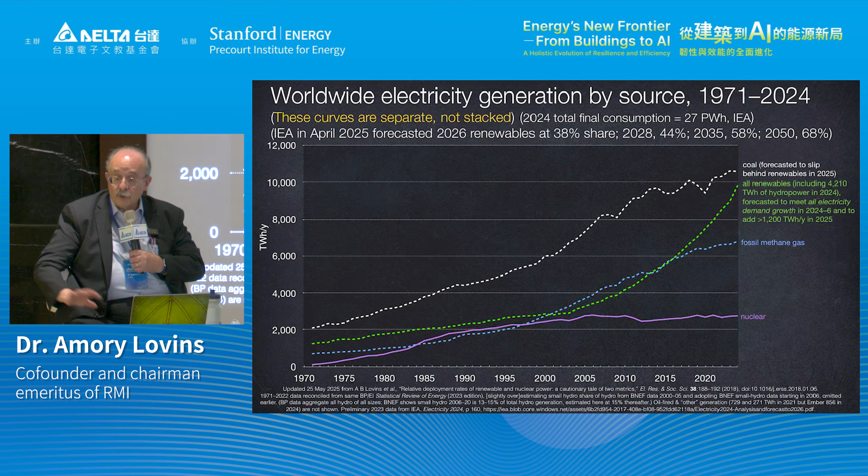Renewables keep getting cheaper as we buy more, because mass producing more equipment drives rapid learning. In contrast, mining fossil fuels causes depletion and raises political risks, so costs rise. Also, renewables deliver energy at a constant price, while fossil fuels tend to have volatile prices.

Valuing that volatility would about double the price of US methane gas, still without counting its carbon or methane emissions. And if we value secure and resilient energy, renewables are worth even more. Most of the world's dangerous instability today has its roots in rivalry over the unevenly distributed fossil fuels that renewables can put forever behind us.

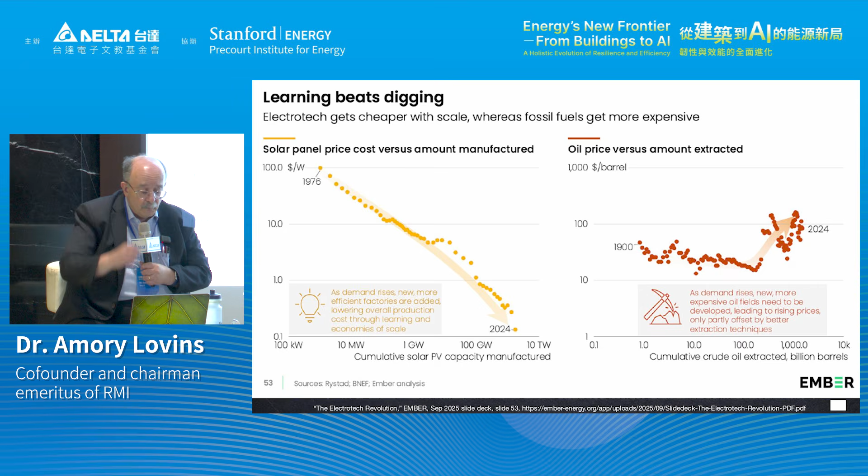And since modular renewables are small, cheap, and quick to build, they can sustain lots of experimentation and rapid learning, while a single massive thermal project is still under construction.

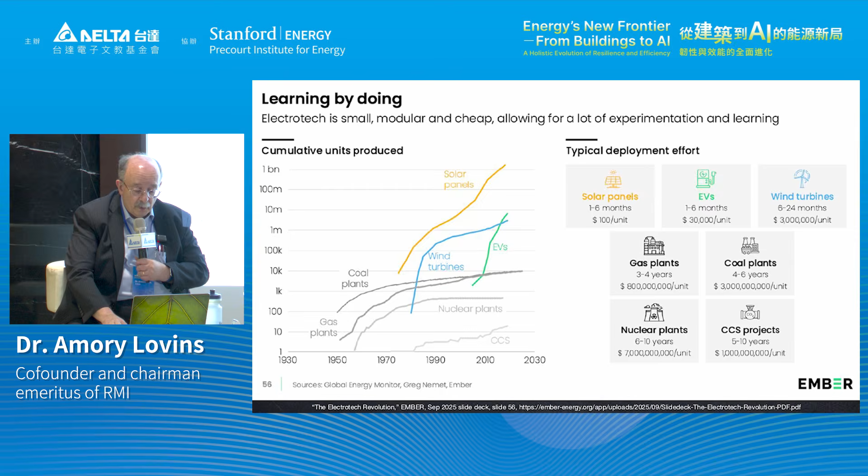Solar capacity alone is surpassing every other global source of electricity, while battery storage surpasses pumped hydro storage. Notice in the left graph how many rivals solar capacity has exceeded in just a few years.

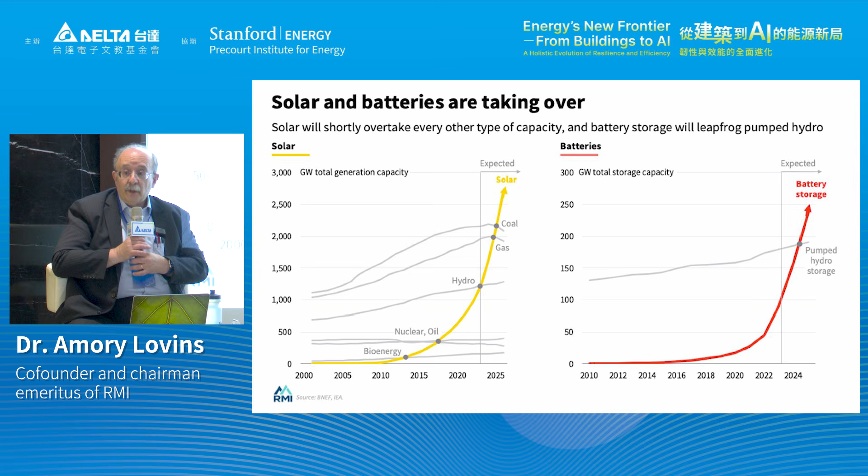A year ago, renewables and batteries were the cheapest choice to make about two-thirds of the world's bulk electricity. And they cost less than just operating about 3/4 of existing power plants.

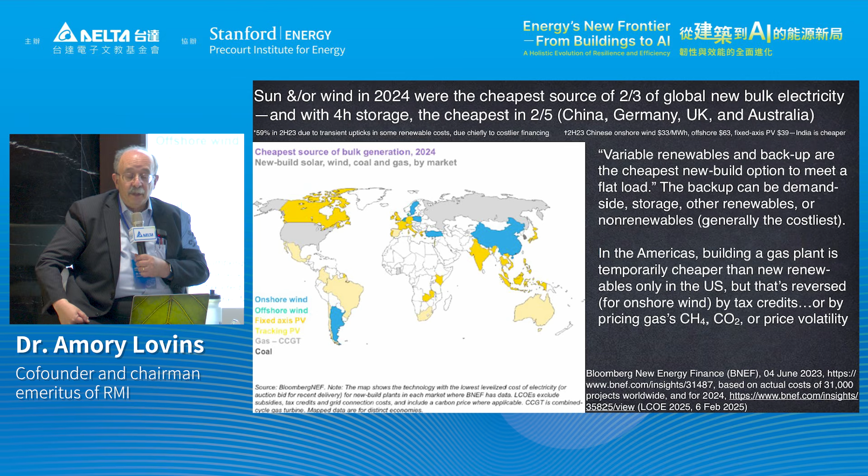Thus, Bloomberg confirmed that the cheapest way to meet a flat load is now solar or wind power plus backup, which can come from efficient and timely use, or storage, or renewables, or generally the costliest fueled generation. So this is why 3/4 of the new firm capacity being added now in India is solar plus batteries.

Renewables can also be incredibly fast to build. A year ago, North America's biggest microgrid was built in 4 months in Sparks, Nevada. Redwood Energy laid 20 megawatts of photovoltaic panels on the ground.

Or where land is costly, the batteries can be safely, cheaply, and compactly stacked up. Then Redwood Energy used novel power electronics and software to combine the world's biggest array of second life automotive batteries, about 800 electric vehicle battery packs, each wrapped in a white tarp and set on cinder blocks, into 62 megawatt hours of unified storage.

Those batteries provide 2 to 48 hours of storage as needed for a few years, then they get hot swapped and recycled.

The result is a 100% solar, 24/7, 365 power supply, delivering 12 megawatts for on-site modular data centers, more reliably than grid power and cheaper than its 8 US cents per kilowatt hour price.

Solar microgrids are safe, silent, virtually water and maintenance free, zero emission, profitable, scalable, and, if necessary, portable. This is what AI speed, ultra reliable, clean power looks like. Gas, coal, and nuclear are not.

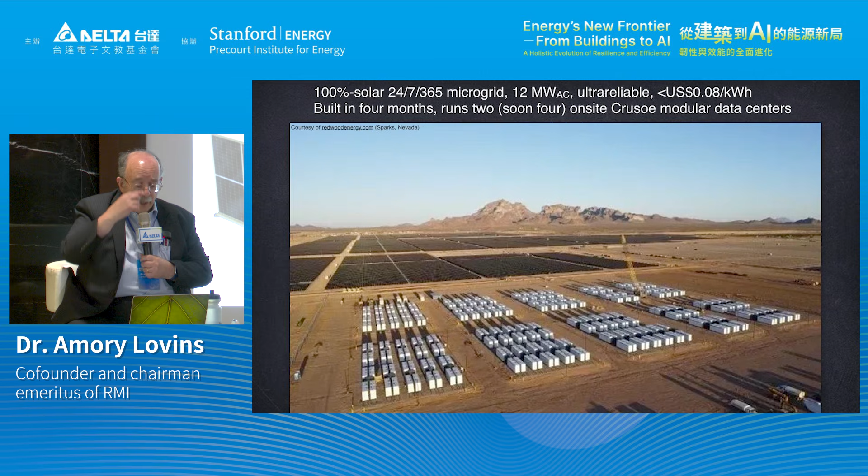A recent Australian innovation slashes solar system costs perhaps by as much as half by eliminating frames, single module handling, racking, wiring, and foundations. Folded up, pre-assembled modules unfold from a hinged stack in a shipping container into long pre-wired rows that can easily be attached to land or structures or over water or crops.

Of course, many people in Taiwan believe that there is not enough land here for solar power. This would be more convincing if we saw solar panels on any of the buildings, but it's very rare. Yet, a paper in Nature 5 years ago showed that the world could run entirely on rooftop solar power.

And this can be built incredibly quickly, as we have seen in Pakistan and in Vietnam.

Some of the biggest installations are agrivoltaics, solar over cropland. Because this manages the moisture and temperature of the soil, it can actually sustain or increase crop yields. It's also very good for grazing animals, which like the choice between sun and shade.

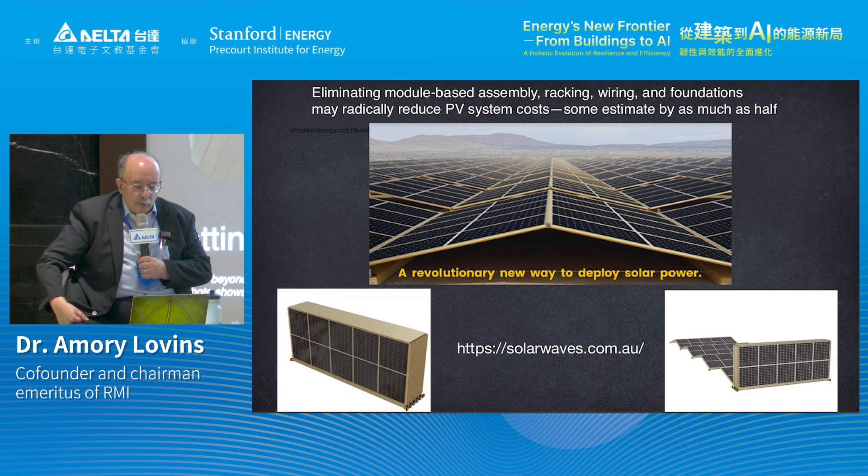Where renewables need a stronger grid, advanced conductor wires carrying twice as much current could nearly quadruple the US transmission addable by 2035. Today's best conductors are even better, carrying 3 and soon 4 times the normal current. They can decongest grids, grow renewables even faster, and make the grid more resilient with smaller, fewer, cheaper towers and far fewer new transmission corridors.

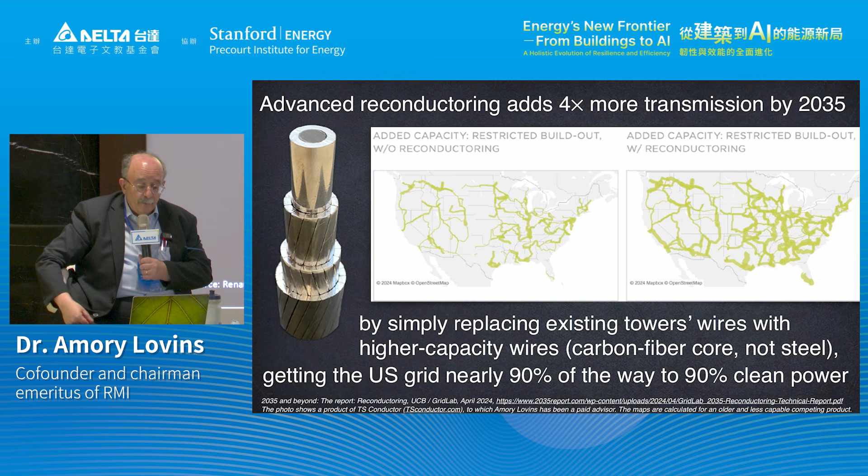A fifth of the world's new cars are now electric, and when they're parked, their batteries can support the grid and provide emergency power directly to buildings using Delta Electronics equipment. French drivers can already get a subsidized electric car for free, charge it for free, and even make money by selling back up to 21 kinds of services to the grid when the car is parked. In Europe, this can earn about $1,000 per car per year, several times the driving cost. Another powerful path to a renewably powered and resilient Taiwan.

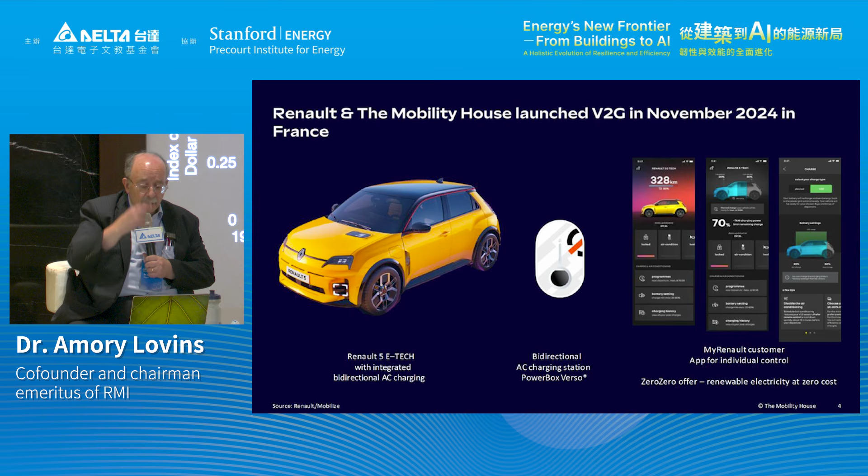But the biggest untold story is about efficiency, about wringing more work from our energy. Around 1975, US government and industry all said that the total energy input needed to make $1 of GDP could never drop. A year later, I heretically suggested it could drop 72% in 50 years. Well, in the first 49 years, it dropped 65%. But just the innovations already added by 2010 could save another threefold, twice what I originally thought, at a third the real cost. With 16 more years of efficiency innovations, now we can do even better, as I'll illustrate next.

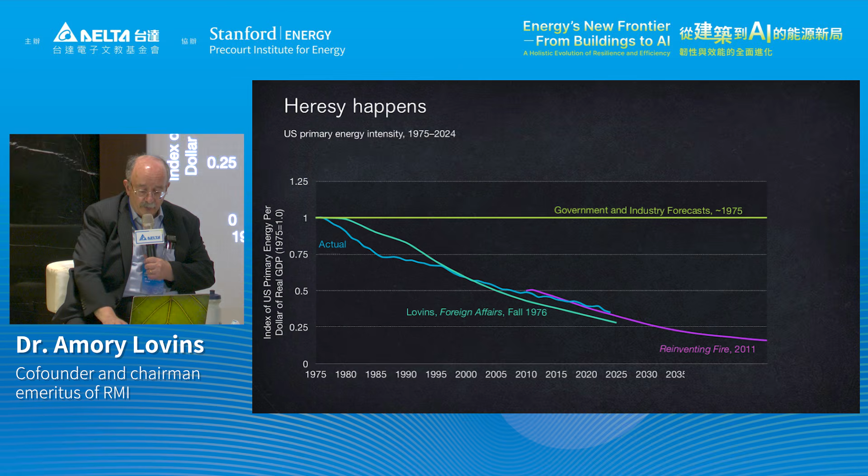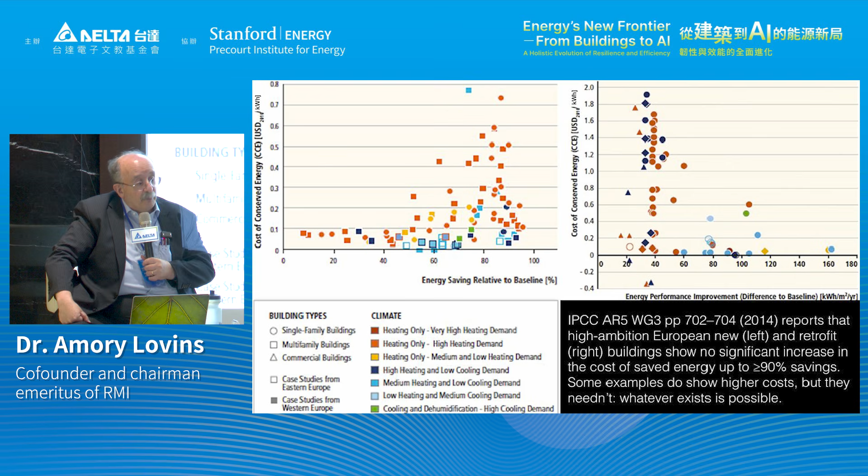Let's start with buildings, which use 3/4 of US and half of world electricity. Here are two graphs that IPCC reported 12 years ago, with bigger savings toward the right and lower costs toward the bottom. Among European new buildings on the left and retrofits on the right, the best projects saved up to at least 90% of their energy without raising the cost of saved energy. Many projects toward the top of both graphs did cost much more by not adopting the best practices shown. That difference is a business opportunity, as also for Taiwan.

A few examples of what's possible. My wife Judy and I live in our owner-builder house, 2,200 meters up in the Rocky Mountains near Aspen, where temperatures used to drop to minus 44 Celsius. The central atrium of our house, seen here in a February snowstorm, has so far produced 83 passive solar banana crops with no heating system. That was cheaper to build 43 years ago because leaving out the heating system subtracted more construction cost than super efficiency added. Our house helped inspire several 100,000 passive buildings in Europe with no heating and roughly normal construction cost.

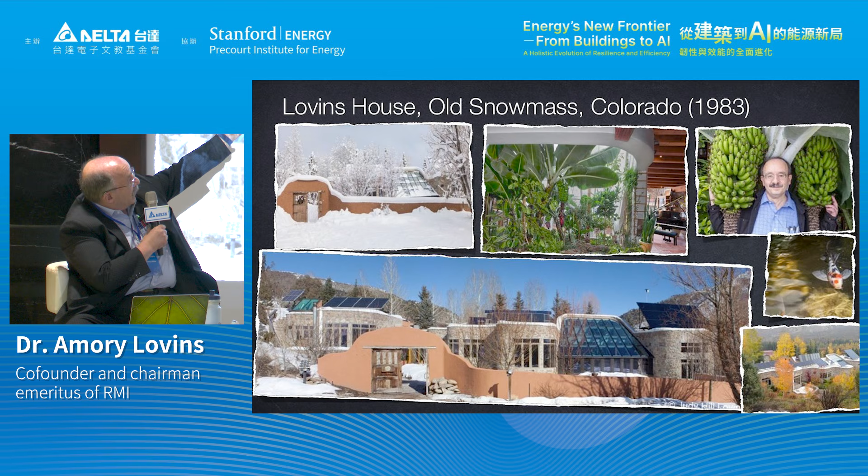A Bangkok analog saved 90% of the air conditioning energy with better comfort and normal construction cost. Nearly everyone on Earth lives in a climate between Bangkok and Old Snowmass, Colorado. But wherever you live, integrative design gives many benefits from each expenditure. So the white arch at the top has 12 different functions, but it has only one cost.

In 2010, our integrative design retrofit saved 38%, now 51%, of the Empire State Building's energy with a 3-year payback. The owner's latest ambition is 80%.

3 years later, our cost-effective retrofit saved 70%, making this half-century-old government complex more efficient than what was then the best new U.S. office, which in turn is only 1/3 as efficient as RMI's net positive, no mechanicals passive office, which uses about 1/9 the normal amount of energy in the coldest North American climate zone. This Bavarian building uses 2/5 less energy still. Takenaka retrofitted its Japanese, very typical office to save 72% of its energy without disturbing the occupants. Yet all these technologies existed more than two decades ago. What mainly improved is not so much technology as design, and both keep improving.

The Dutch energiesprong method of super outsulation can probably retrofit most buildings to net zero energy and install in as little as a day. Inside the house, the best heat pumps can heat 6 to 15 units of hot water per unit of electricity. Cooking efficiency can quadruple. I doubled ours just by using Turkish vacuum-insulated pots and pans.

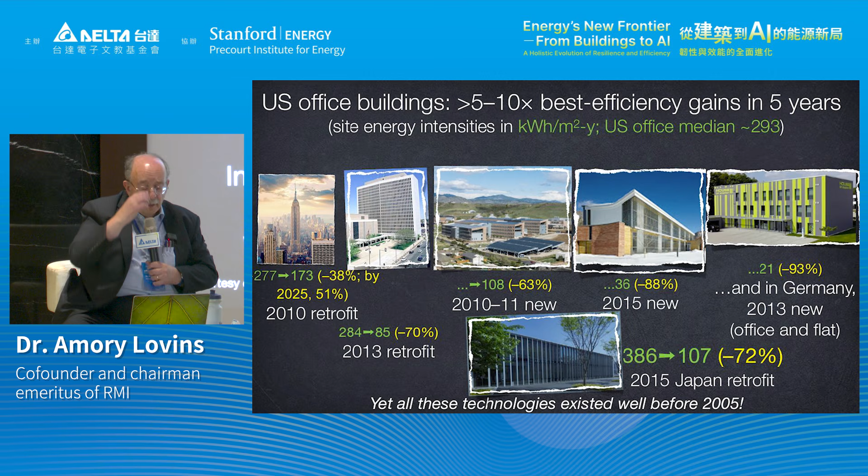In 6 very hot and humid Indian cities, 1.5 million square meters of integratively designed offices used 80% less energy than the Indian norm, with 10 to 20% lower construction cost, 60% less cooling capacity, but superior comfort and satisfaction. Glare-free lighting is delivered throughout by contract. If workers complain of glare and demand blinds, the architect doesn't get paid.

But now there's an important new cooling option, delivering coolth radiatively. In this shaded pavilion, Singaporeans stayed comfortable outdoors without cooling, drying, or significantly moving the hot, humid air. At 32 degrees and 80% relative humidity, their body's far-infrared radiation was absorbed by panels shielded by a thin plastic film and cooled by 23 to 25 degree water. Special radiant roof surfaces can now cool that water passively, even in full sunlight or under monsoon cloud, using no electricity. If this approach can be made cheap and vernacular enough to retrofit into the world's hot climate apartments and slum dwellings, that could potentially eliminate global growth in peak electricity demand.

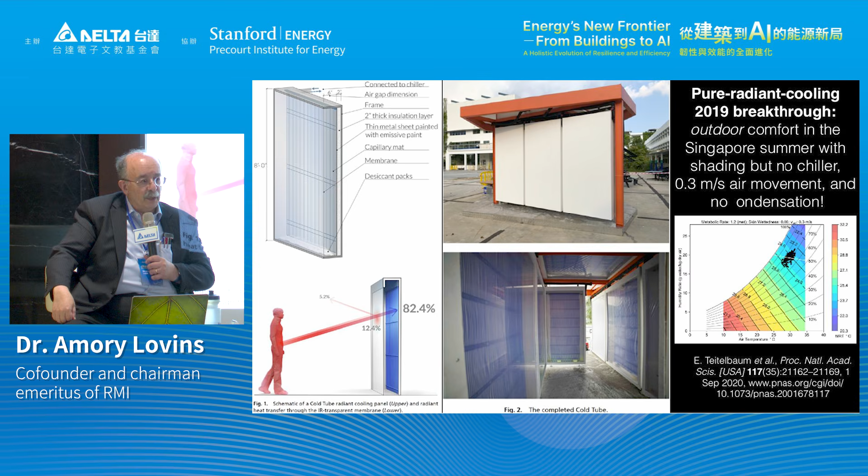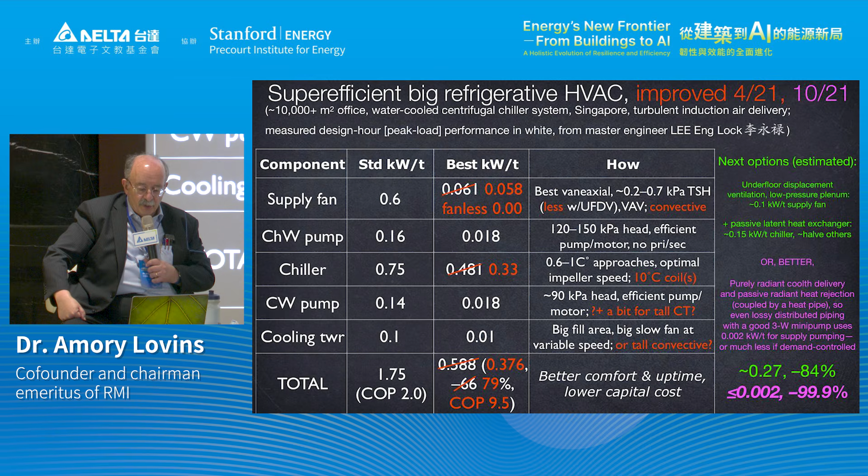Mechanical cooling is common and important in Taiwan. In the 1990s, Lee Eng Lok's world-leading practice in Singapore regularly reduced the measured power intensity of standard big building HVAC systems by 66%, as shown in white. That's for the whole system, supply fans through cooling towers, at the design hour. 5 years ago, Mr. Lee could raise that whole system saving to 79%, 9.5 units of cooling per unit of electricity.

That's shown in red. Adding underfloor displacement ventilation and passive latent heat exchangers could raise the saving to 84%, in green. Even more radically, in magenta, radiant coolth delivery plus passive radiant heat rejection could probably cut total cooling power to roughly 1/1000th of standard practice, with much lower capital cost. Let's try this in Taiwan. What are we waiting for?

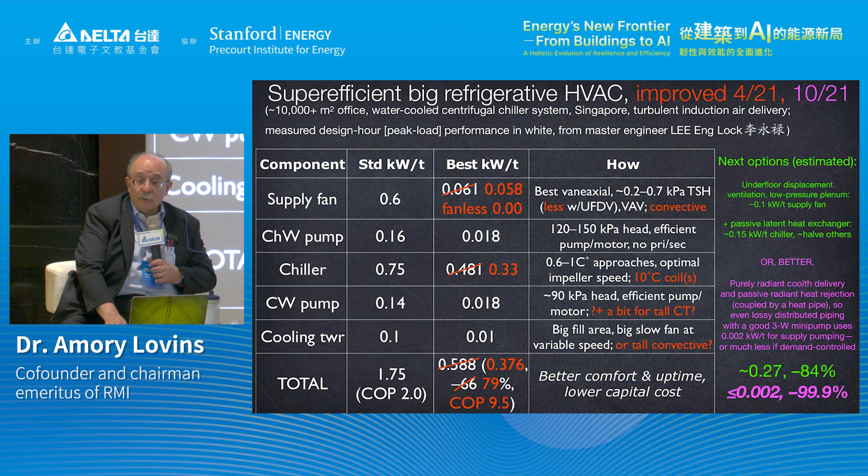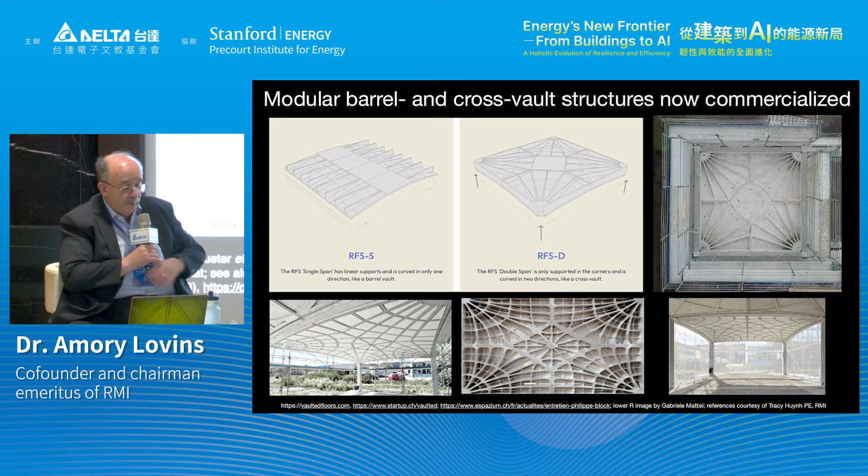Now combine the thin floor slabs with passive design, which eliminates a vertical meter or so of mechanicals at each story. This allows 3 stories with normal 2.8 meter ceiling height to fit in the vertical space now occupied by 2 stories. Cost, complexity, and time fall dramatically. You get about 55% more net rentable space in the same height and the same footprint. And it's cheaper. Why would you build any other way?

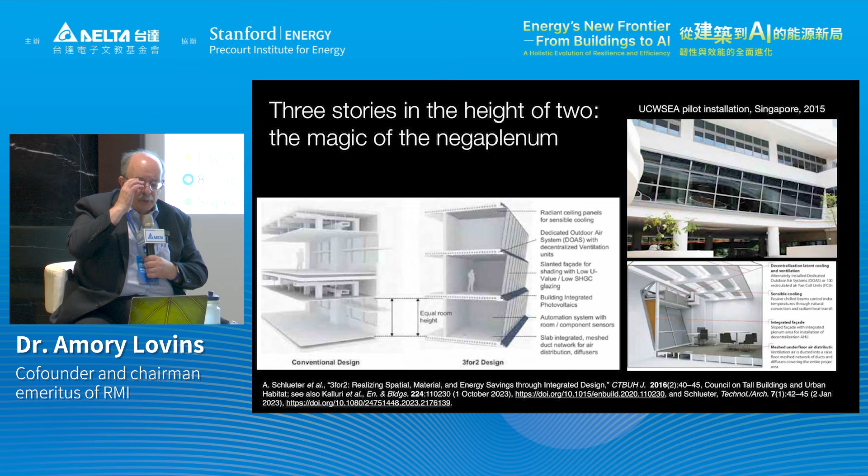Industry uses half the world's energy and electricity. My RMI team's latest $60-odd billion worth of industrial redesigns typically found about 30 to 60% energy savings on retrofit, paying back in a few years and far outperforming the orange zone in the upper left, where most energy service companies deliver disintegrated design. The shaded big blue circle summarizes mechanical retrofits in 8 chip fabs, averaging about 40% saving with a 1.5-year payback.

Our new build industrial projects generally found about 40 to 90+% savings with lower than normal capital costs. The shaded blue circle is a new chip fab. Our integrative design combines conventional technology with beginner's mind.

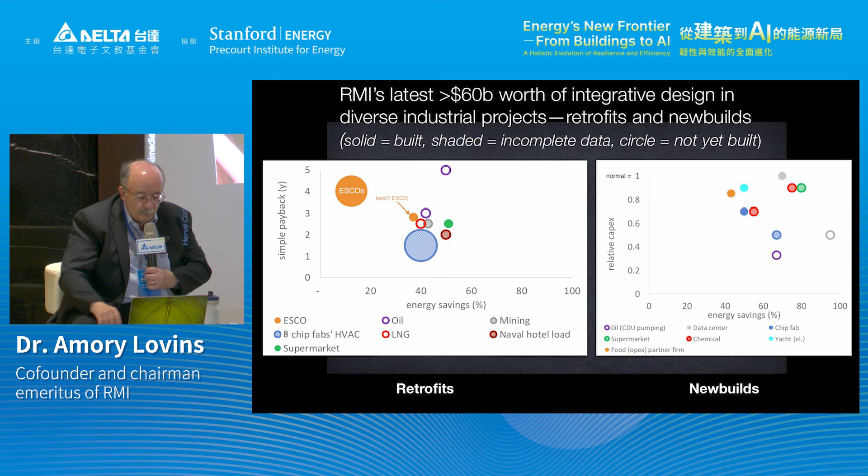For example, half the world's electricity runs motors. Half their torque runs pumps and fans, feeding into pipes and ducts. If the pipes and ducts are made not thin, long, and crooked, but fat, short, and straight, their friction drops by 80 to 90+%, 97% in our house. Typical payback times are less than a year in retrofit, instant in new build. Yet this is rarely taught or done because it's not a technology, it's a design method. And few people think of design as a path to speed and scale. But if everyone did this, it could save 1/5 of the world's electricity.

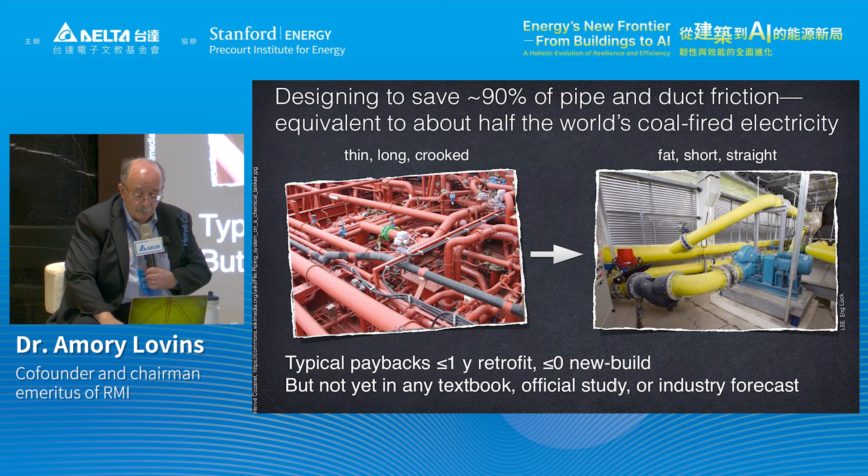To do this magic, we simply make two changes in the design process. First, we specify big pipes and small pumps, not small pipes and big pumps.

Friction in a pipe falls as nearly the 5th power of diameter. So how fat should the pipe be to optimize the friction? The textbooks say to make the pipe just as fat as will repay its extra cost over the years from the saved pumping energy. But that's wrong, because it leaves out the capital cost of the pumping equipment.

The pump, motor, inverters, electricals must all be big enough to overcome the friction. So their size, and roughly their capital costs, will fall as nearly the 5th power of pipe diameter. Yet the capital cost of the fatter pipe rises as only about the 2nd power of diameter. So when we optimize the pipe as a component, we pessimize the system. Instead, optimizing the entire system yields fat pipes, tiny pumps, so the total capital cost goes down.

The second design change is even simpler, therefore harder. We lay out the pipes first, then the equipment, not the reverse.

Traditionally, we put the tanks, boilers, and so on in convenient, arbitrary places. Then we ask the pipe fitter to come connect point A to point B. But by then, A and B are far apart. Other stuff got in between. They're at the wrong height. They face the wrong direction.

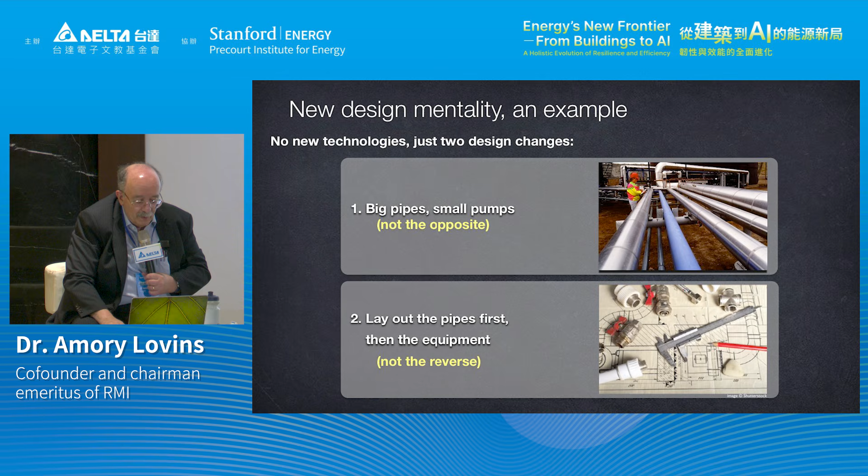I'm currently writing an illustrated how-to manual called The Tao of Pipes. It's a hilarious dialogue between two fictitious Chinese factory engineers discovering together how to untangle their pipe noodles.

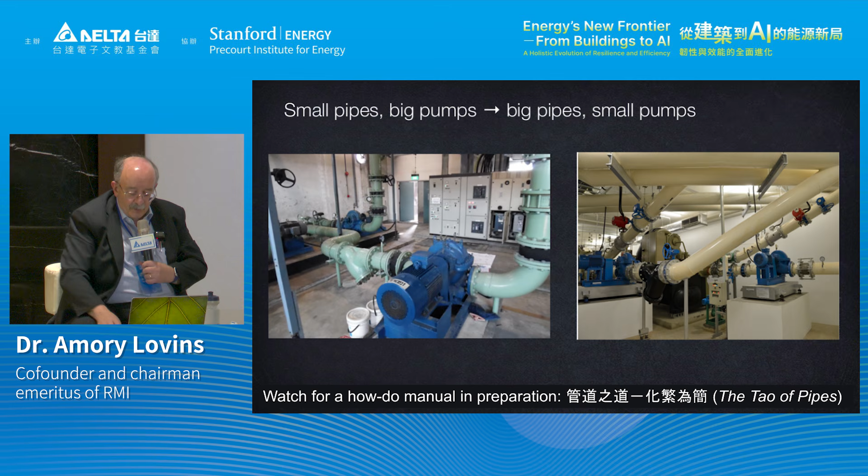Applying these concepts at the Oakland Museum in California, Peter Rumsey retrofitted an efficient layout into the condenser water pumping loop. This cut the energy for pumping by 3/4 with a 2 or 3 month payback, and it eliminated 15 pumps that will never again waste energy and maintenance costs.

When he also repiped the chilled water loop and added variable frequency drives, this doubled the flow and saved 85% of the energy.

To help the pipe fitters understand how to minimize friction, he simply asked them to lay out the supply pipes as if they were drains. Because in another part of their brain, they know that drain pipes, whose flow is driven only by gravity, not pumps, will clog if they're too small or have too many elbows and joints.

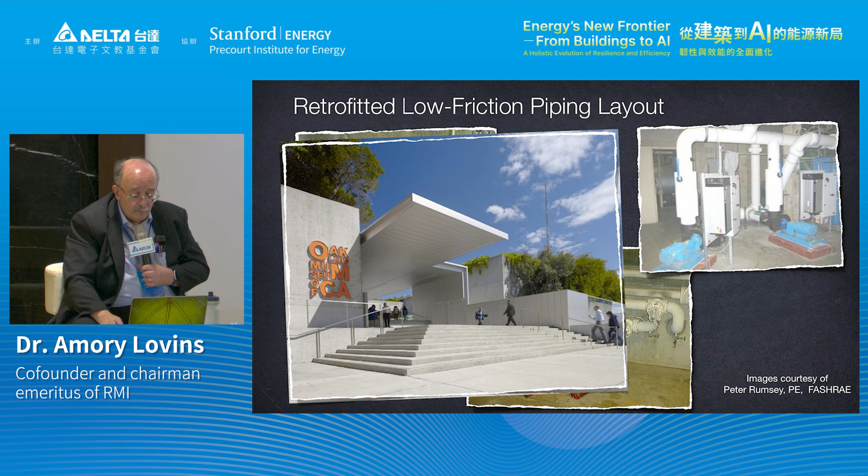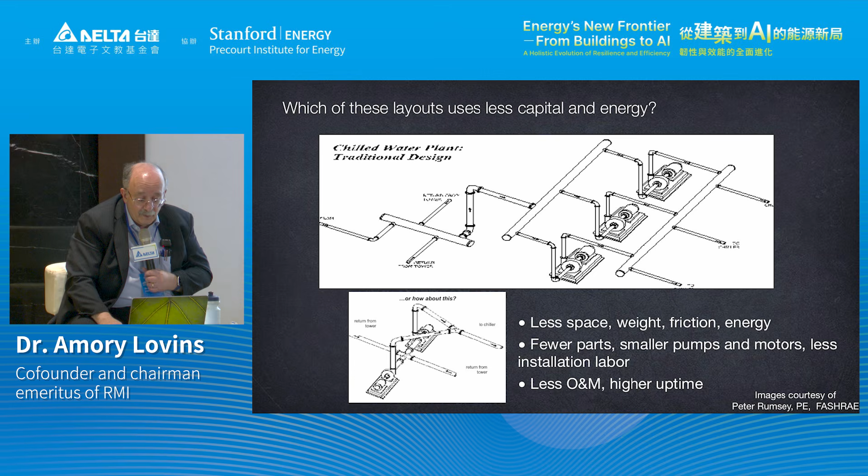In a Dutch industrial case, this approach cut pumping energy by at least 7-fold. Actually, the engineer measured it at 12-fold, with lower capital cost. And as a free bonus, it also saved 70 kilowatts of heat loss with a 2-month payback, because it was easier to insulate short, straight pipes.

But belatedly, I realized we had left out 8 additional benefits we could have captured, each justifying even bigger savings. I later estimated that if we'd properly valued these extra benefits, we would have saved not 86 to 92% of the pumping energy, but probably around 98%, with even lower capital cost.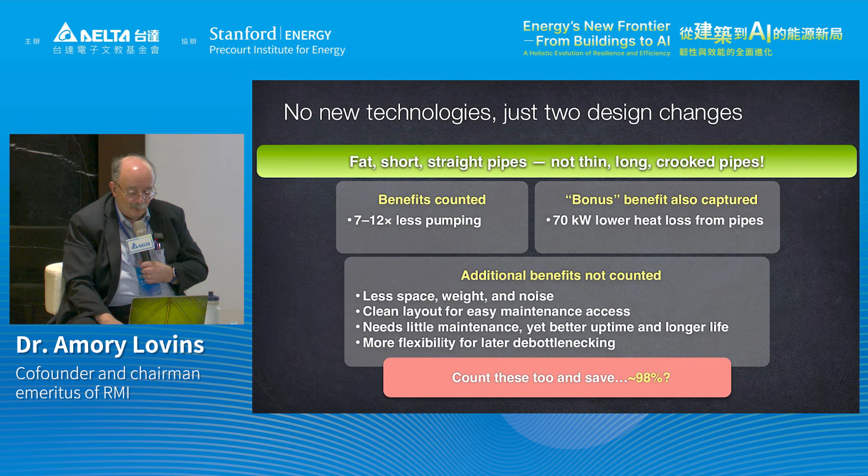Now think of the whole power and pumping system. From the fuel burnt at the thermal power plant to the end use, many successive losses compound, so only 1/20 of the energy in the fuel comes out the pipe as flow.

But now turn those compounding losses around backwards from right to left, and they become compounding savings. Every unit of flow or friction you save in the pipe saves 20 units of fuel, cost, emissions, and global weirding back at the power plant. And as you go back upstream, the components get smaller and cheaper, so the total capital cost goes down. Combine that with improvements to the motor systems as you make those 5 or 10 times smaller, and you raise the potential electric savings from 1/5 to 1/3 of the world's electricity.

That's not in any official forecast, studies, standard textbooks, or climate models. Again, that's because it's a design method.

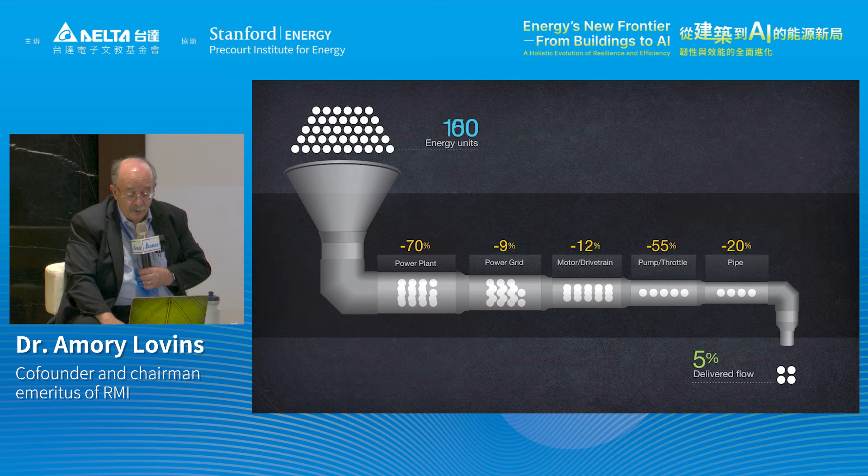Now think about this in a classical data center. Two-thirds of the fuel fed to the thermal power plant is lost in the plant and grid. Half that electricity is lost in the cooling system and uninterruptible power supplies before reaching the servers. Half the server energy does not reach the chips because it's lost in inefficient, usually very underloaded power supplies, not made by Delta.

And lost in lots of fans taking heat that largely shouldn't be there off the motherboard into the room, so we can do dumb things with it. The next problem is severe underutilization of computing resources, partly through lack of virtualization.

So the resulting energy flow is so small it's about to vanish, so let's magnify it. Next comes bloatware, running many unnecessary threads and processes and making simple tasks very complex, because the compute cycles were cheaper than programmers' attention, and someone else bought the energy.

Downstream of all that, you may even have inefficient business processes. So altogether, a few hundred thousandths of the original input energy in the fuel ends up delivering customer value.

Where should we start fixing this? Downstream. First, we write elegantly terse code, efficiently compiled, with the goal that every compute cycle is needed and wanted. I had assumed this might save an order of magnitude in compute cycles. Actually, it's 2 orders of magnitude, and with today's AI slop, it might be 3.

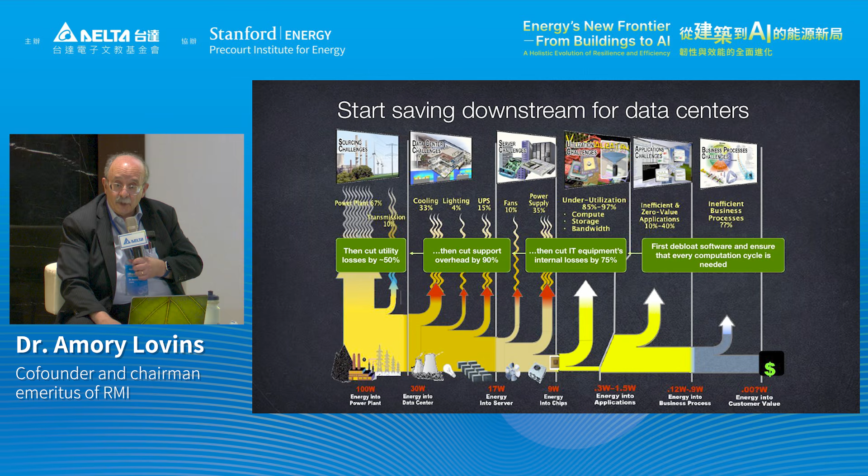In the project for which we made this diagram, our partner EDS said that if our recommendations had all been adopted, we would have saved about 95% of the total energy and half the capital cost. In fact, the client rejected most of those suggestions that EDS agreed with, so we could only triple the efficiency at the same cost. Very disappointing.

But progress continues and adoption expands. In just 8 years, the world's data centers had enormous growth shown on the left in all their parameters, but almost completely offset that activity growth with a combination of efficiencies, the blue bars. So computing went up 550%, electricity use went up only 6.5%.

In the past few years, AI-boosted growth might be changing this pattern, but that may not last because electricity used per unit of AI services is falling by about 4-fold per year.

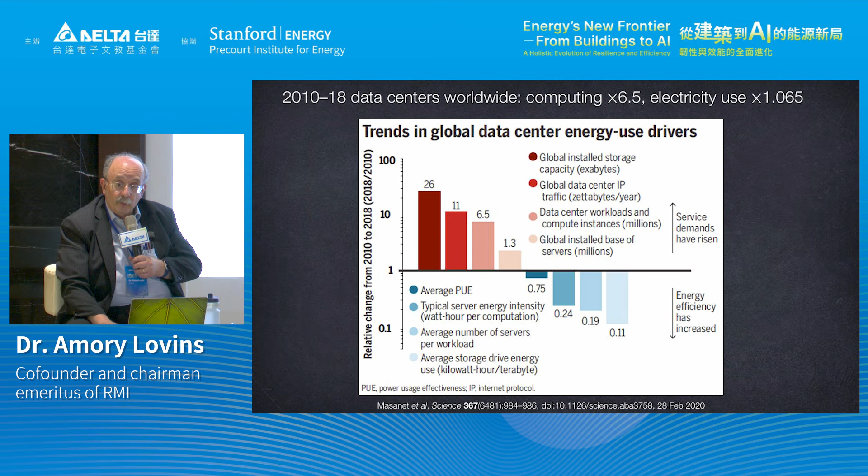In 2003, we convened over 90 industry experts and together found ways to save about 89% of data centers' energy use. And these findings proved influential. So instead of a data center commonly using 2.5 units of energy per unit used by the servers, the world record is now 1.02.

But the collective potential of further efficiencies, especially in software and system architecture, can cut electric intensity by 5 orders of magnitude, or 10 orders of magnitude with optical chips, just demonstrated in China. Maybe we can even approach the computing efficiency of the human brain.

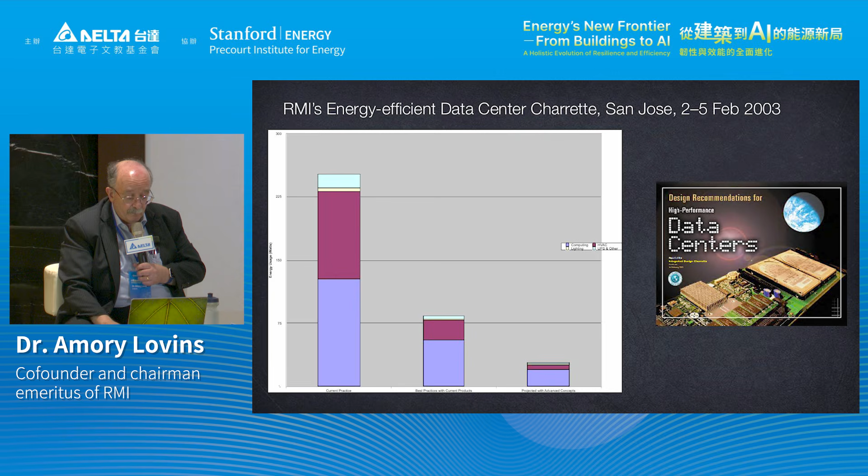Now, Paul Westbrook and I co-led the redesign of this Texas Instruments wafer fab to use 40% less energy with 30%, or $230 million, lower construction cost. So it was built in Texas, not in China or Taiwan.

Its system efficiencies eliminated one of the two utility floors. It inspired cutting company-wide chip-making energy intensity by 70%, water by 62%, greenhouse gases by 72%, with further gains to come.

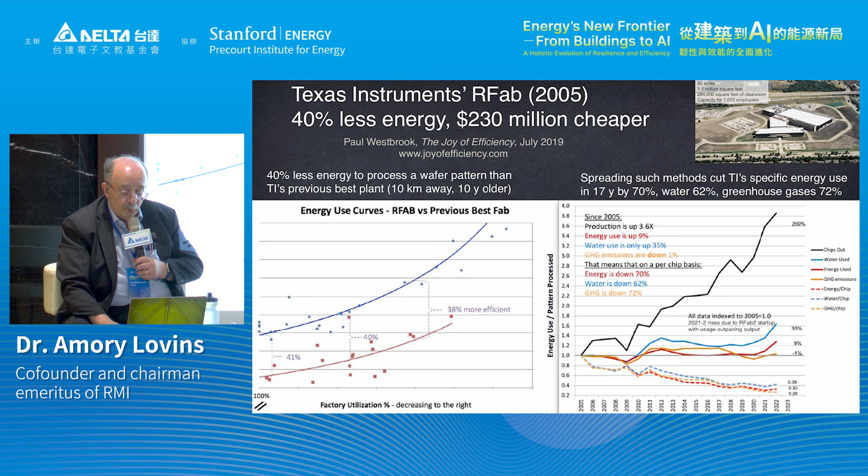We helped another major chip maker discover how to save roughly two-thirds of a new wafer fab's energy use and half its capital cost. We could replace all 22,000 tons of chillers with any of 3 cheaper to build natural cooling methods, over 10 times more efficient than electric chillers, but far cheaper.

The group set 3 levels of increasingly ruthless ambition: no brainer, no regrets, and no prisoners. This graph doesn't show the savings in cooling and other auxiliary equipment when you save a unit of tool energy. But if you count those interactions, the ambitious scenario on the right would be at least a factor of 4 below a base case the client thought was close to optimal.

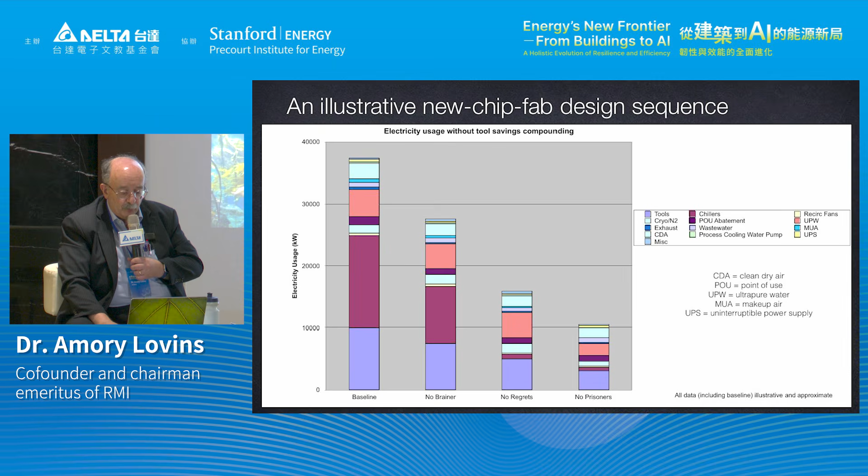Many of our innovations now are inspired by nature. An Australian sea captain, Jay Harman, in California and Australia, developed a new kind of hydrodynamics. He noticed this ropey Fibonacci spiral as water ran out of the bathtub and thought that must be the minimum energy shape for that surface between air and water. So he asked, if I make a pump rotor that shape, maybe it would be the most efficient rotor. So he did.

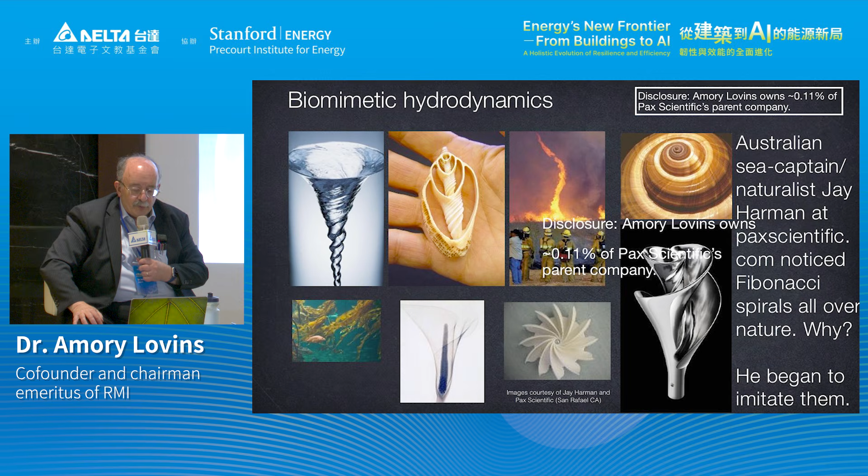If your 100,000 kilometers of fractal blood vessels had the design and friction of standard industrial piping, you would need a heart bigger than your body. Very inconvenient. But in fact, your 1/3 of a kilogram, 1.5 watt heart is big enough because your blood follows nature's standard design, laminar vortex flow. Now that we know how this works, pumps and fans using such Fibonacci shapes can raise efficiency by about 20 or 30%.

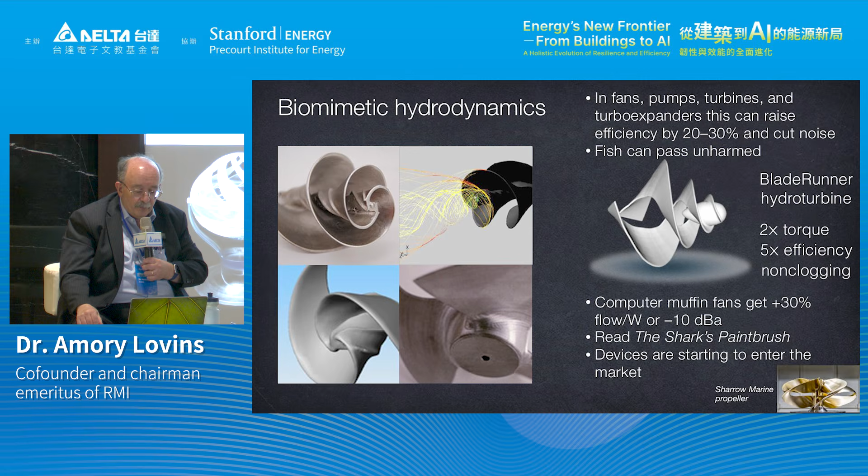In fact, the hydro turbine on the right even lets fish pass through unharmed. And the latest rotors in little fans, the latest at the bottom, use 50 to 85% less power per unit of flow than competitors from Holmes and Vornado and even Dyson, while providing higher airspeed with much less noise.

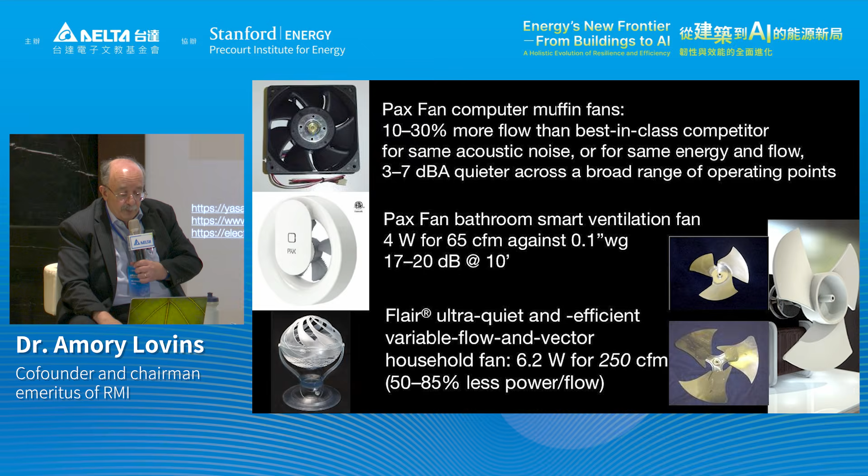Motors, too, keep getting smarter, more efficient, now often 97 to 99%, and in the past 5 months, shockingly lightweight. The British 1,000 horsepower motor on the right produces an astonishing 59 peak kilowatts per kilogram.

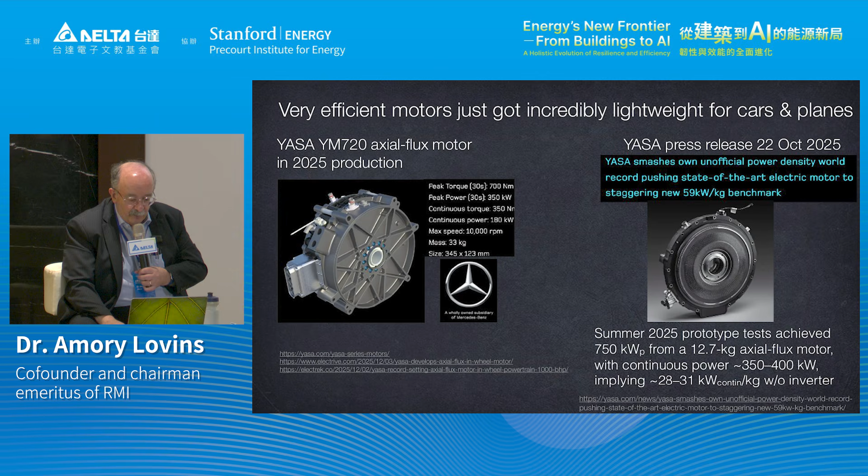And that enables revolutionary vehicles. But 2/3 of the energy needed to move a car is caused by its weight. BMW showed how integrative design can lightweight a car at competitive cost, even at 2013 carbon fiber prices. I drive such a car. It made money for all 250,000 units, and its carbon fiber was paid for by the batteries that its lightness saved.

And fewer batteries mean faster recharging with less electricity, infrastructure, emissions, and investment. This car's integrative design snowballs weight savings much more than usually assumed. Its manufacturing is radically frugal. It eliminates the 2 hardest, costliest steps in automaking. It's much better for workers, and its efficiency is quadrupled without compromise, 53 kilometers per liter equivalent, with many driver advantages.

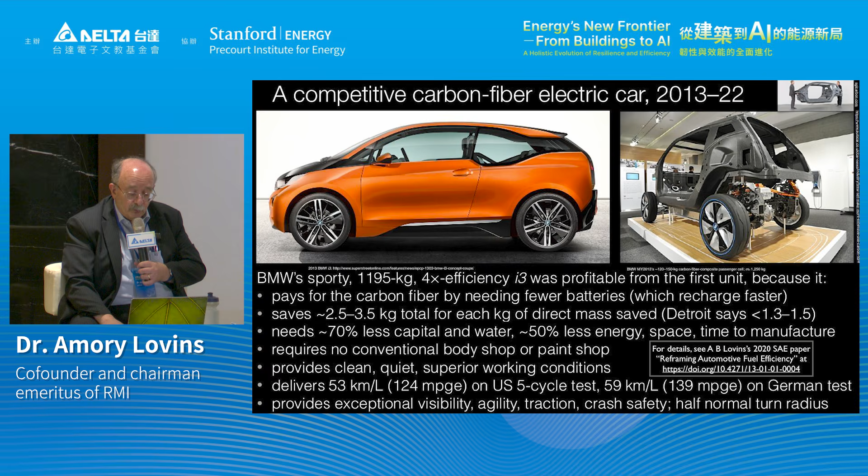Lighter, lower drag big vehicles are also emerging. This Tesla semi-electric truck, entering mass production this year, has 3 to 6 times normal efficiency. This quiet diesel air taxi can fly from Taipei to San Francisco using 1/8 the fuel of a typical business jet, and can scale up probably to 777 size. Now we can even use lattice and membrane structures to save about 98% of the weight in metal aeronautic structures.

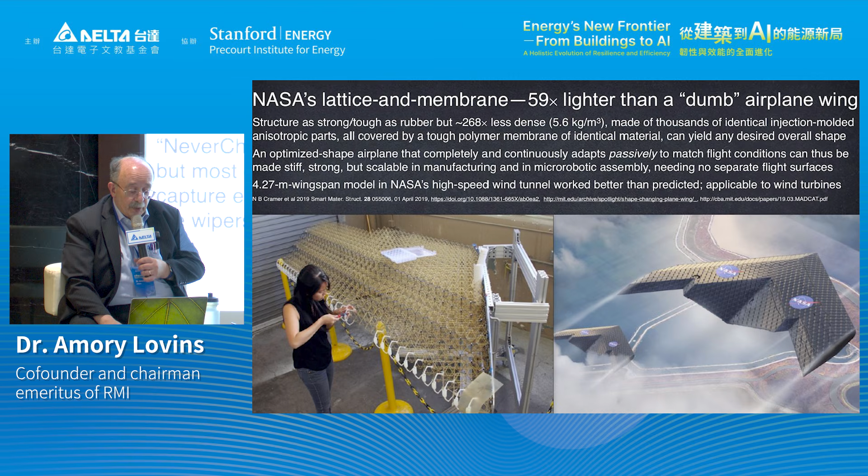What's next for electric cars? Solar-powered ones. Two light and sleek ones ready to enter the market as soon as they finish raising production capital get 107 with 5 seats, or 146 kilometers per liter equivalent with 2 seats—2 or 3 times more efficient than a Tesla. So efficient that they run just on solar power from the roof of the car for ordinary driving of about 20,000 kilometers a year without plugging in. And if we apply the same thinking to airplanes, I think our grandsons may fly all solar-powered airliners across the Pacific.

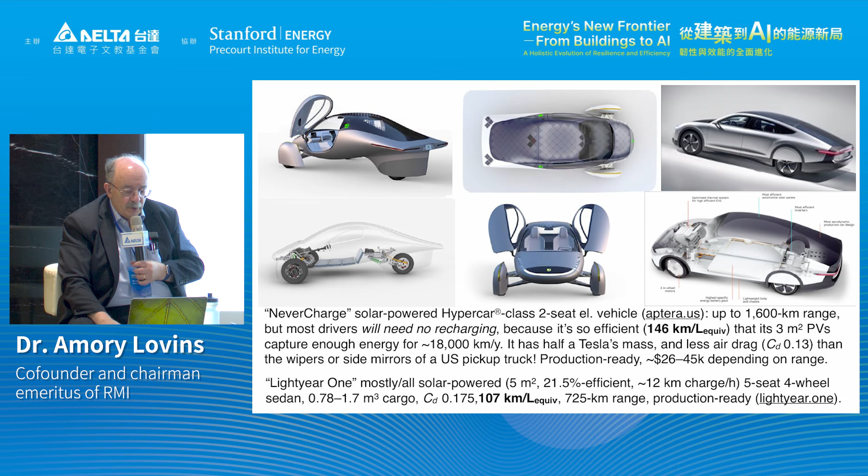If you want to know how to apply the 10 pillars or principles of integrative design that can produce such results, the 15 lectures from our Stanford course are posted free at efficiencyhub.stanford.edu, and soon we will post the slides with their presenter notes.

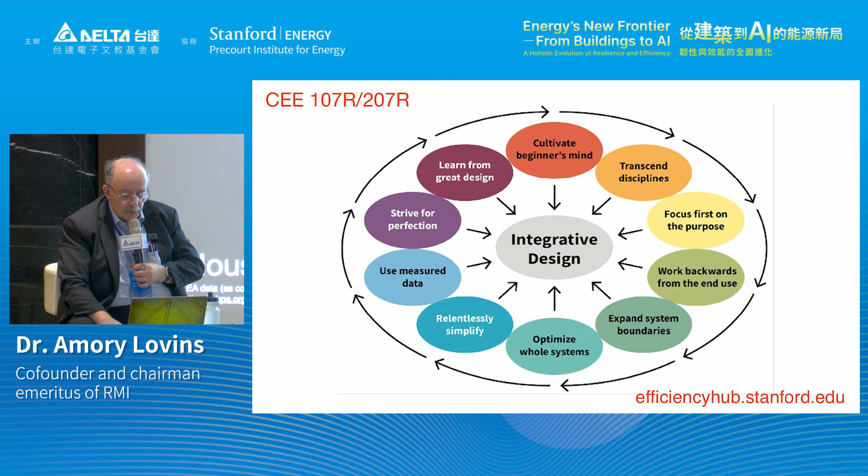So given these efficiency examples and hundreds of others, let me caution you against the assumption that electrification will need several times more electricity. Over 33 years, Norway used only 24% more electricity as its car fleet became 1/3 electric. 63% of its fairly efficient housing stock adopted heat pumps, and its GDP grew by 105%. Norway was well electrified to start with, but this example still casts doubt on very high electricity forecasts.

So we have, as also in Taiwan, a huge efficiency potential, which makes renewables faster, cheaper, and easier to install. And we need vision and will to put all these moving parts together. But I think the basic conclusion is that we should go forth and be fruitful and subtract. Thank you.